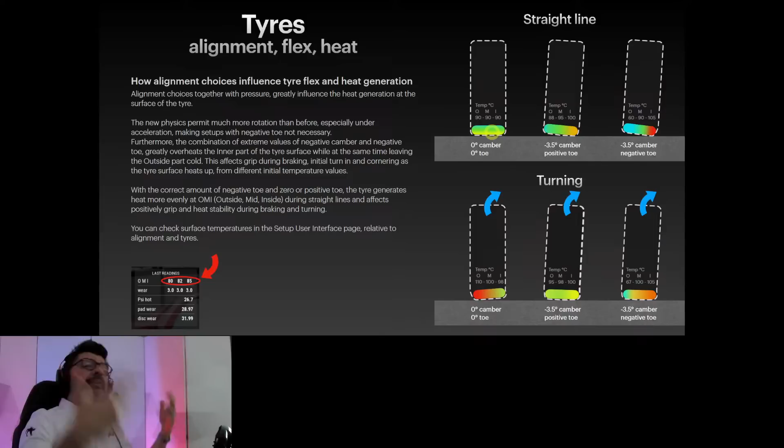Okay. So here's what's going on. When we're riding in a straight line, ideally with 0 camber and 0 toe, the heat generation is going to happen from the flex of the tire as it rotates under the weight of the car, the downforce, whatever. We're going straight, we have 0 camber, 0 toe, and the heat generation affects the whole footprint of the tire. So you're going to see, for example, something like 90, 90, and 90 degrees on the outside, mid and inside of the tire. All right.

Now, when we are adding negative camber to the tire, in a straight line, what is happening is that the inner side of the tire is touching the ground, while the outside of the tire is practically not touching the ground. Especially with radial tires, which have an extremely stiff footprint. They don't flex much in the footprint, so when you give them this kind of camber, only the inner part of the tire is going to touch the ground.

And so you're going to end up, again, this is just an example, with something like 100 degrees on the inside, 90 degrees at the mid, and 88 degrees at the outside, which is not touching, and it is cooled down by the air, and only by the air.

Yes, this document will be released with the update on Wednesday, free for all. You will have that as a mental note. You can read about it, take care about it, and take the best advantage from it as much as you want. Now, what happens when we do negative toe?

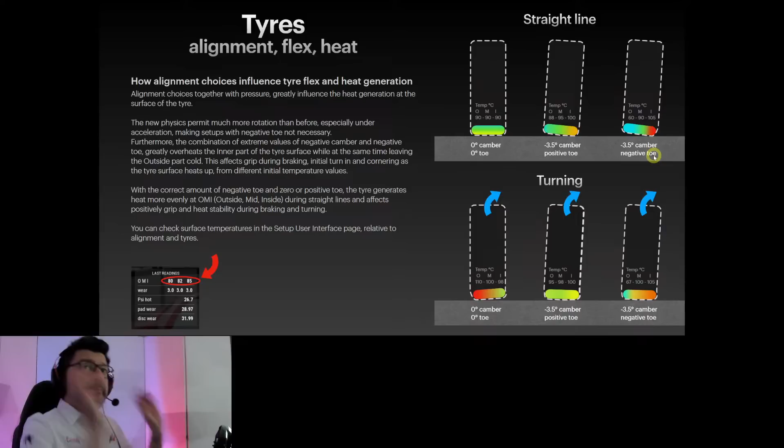Okay, so we get the negative camber and negative toe. All right. So when we do negative camber at the same degree and negative toe, the tire actually wants to rotate and go to the outside with negative toe. And that means that because it wants to rotate and go to the outside, it's going to flex the inner sidewall and touch even more and has extra friction on the inner side of the tire. So you're gonna get even more heat generation on the inner tire.

All right? That's going to mean that the mid of the tire is going to raise and have even less temperature, and the outside tire is going to raise up even more and have even less temperature. So the delta between the inner temperature and the outside temperature is going to be higher. Now, this again is an exaggerated situation, but it is to show you what is going to happen. Okay?

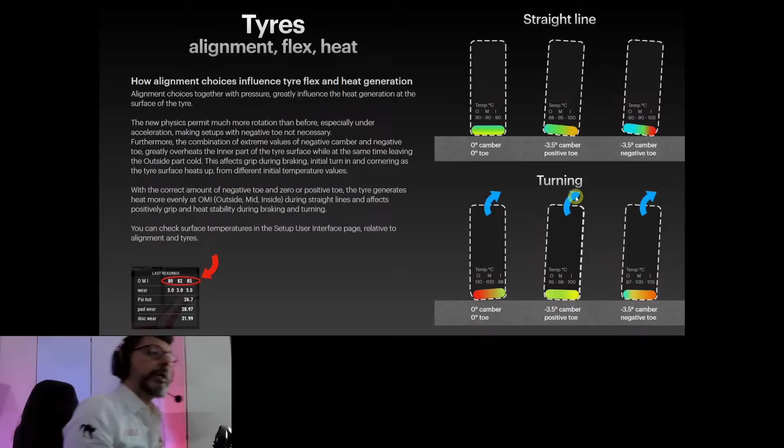Now, what is happening when you're going to turn? Well, if you don't have any camber, the tire obviously is going to flex and it's going to touch the ground. The footprint is going to be touching with the outside, so you're going to get a lot of heat on the outside. We've noticed that at Barcelona with very low camber and very low pressures. So flex of the tire, outside touching the ground and making all the grip, and the inside practically almost raising up and almost not touching and having much less grip. So this is not an ideal solution because you're going to have a lot of temperature at the outside and less temperature on the inside.

If you have a lot of negative camber and some positive toe, that will create the biggest footprint of the tire, and it will give you a good delta and graduality between the outside temperature, the mid temperature, and the inside temperature. It might not always be as ideal as this, because we saw before at Barcelona, for example, that the outside temperature was reaching anyway 105 degrees, okay?

But the more negative camber you have and some positive toe, the closer the difference between outside and inside is going to be, and that will help you, and it also means that you have a big footprint of the tire to the ground. All right? So it is an advantage. Again, the numbers will vary a lot depending on the track surface, the ambient temperature, how you are pushing the tires, the pressure you have, how long is the turn, and so on and so forth.

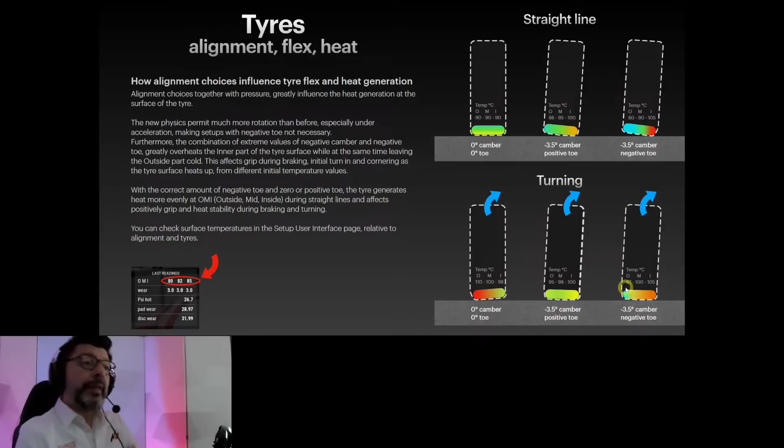If you're using negative camber and negative toe, the inside, already very heated up on the straight line, is going to still be heated, and the inside is going to raise and the outside will remain very cold at the initial part of the turning. That means that while you are going into the turn with negative toe now, you are going to get more instability because of that, and your grip is not going to be ideal, because you're going to have a big delta between inside and outside.

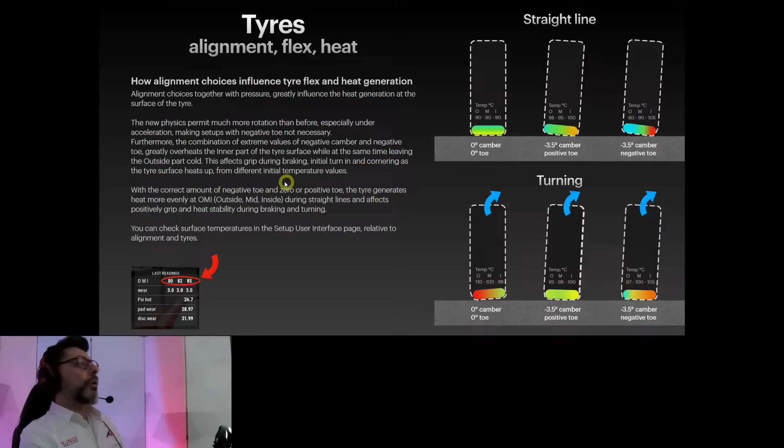Okay, and I would like to demonstrate that to you and show you also what difference it is. The difference is not amazing, it's not night and day, but there is a difference, and we will talk about also how this is going to affect your tires later in a longer stint. All right, so let's go in game again and see about that. So I would like to show you this at Monza in a hot stint, because it's going to be very easy to demonstrate. So let's go at Monza. Same car, same conditions. Okay.

Thank you for the follow, Kev. Consistency. Try to be fast, but don't push it too much over the limit.

All right, so we're going to go at the aggressive setup, and we're going to go full crazy negative toe and all the negative camber that we can get. All right? And let's see what is going to happen. So what we're going to do now is we're going from the hot stint, which is before the Parabolica. We're going to do the whole Parabolica, the whole start-finish straight line, and at the braking reference point, we're going to hit ESC and come back and see what happens, and take note of the inside, outside, and the mid temperature of the surface of the tires. All right? So let's have a look at that.

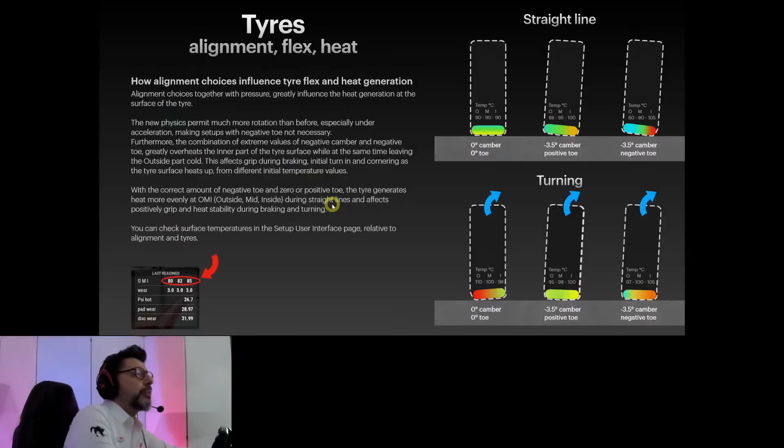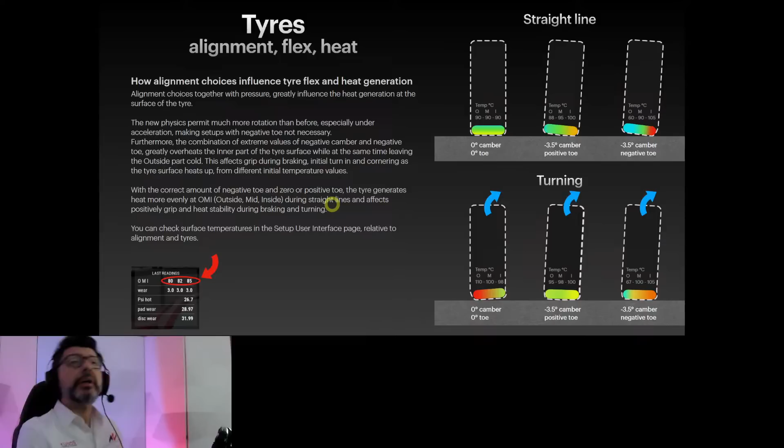Are the meta setups going to work? Sometimes yes, not always. What I'm expecting is that if you get this new version and instantly try a meta setup, you're going to get so much rotation that it's going to be, you know, not so good to drive. But most importantly, with our testing, and also the eSport drivers, the qualifiers for Monza, are testing the beta right now.

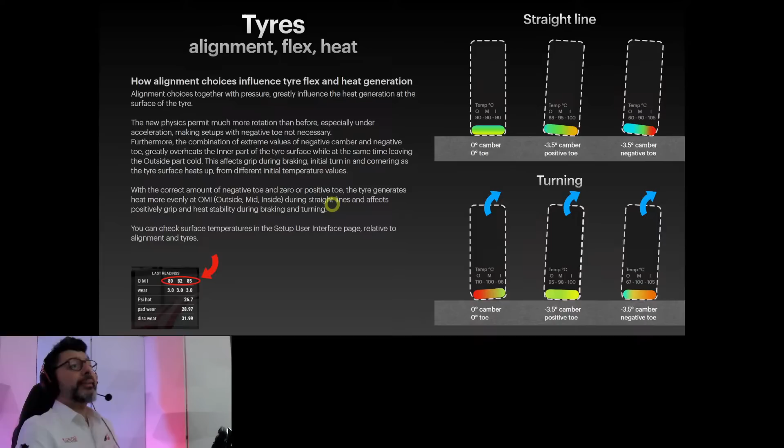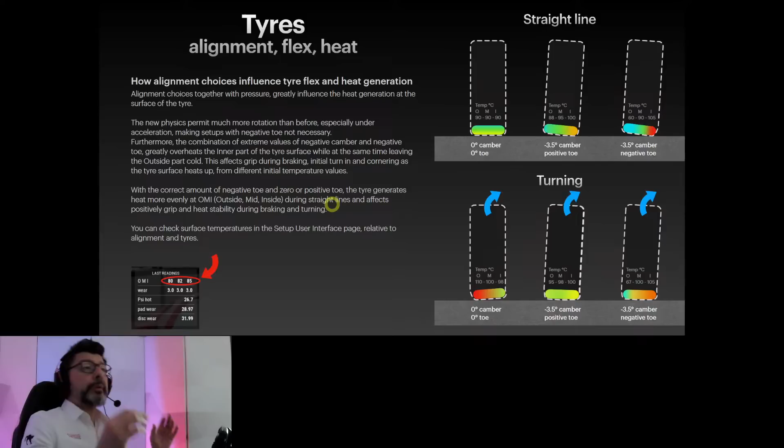And what we see is that it brings you to a dead end on the setup strategy, you don't know what to do, and the car doesn't really react that nicely. It pays much more, both in terms of handling, how you feel the car and how consistent you can be, and possibly even lap times, because we see that they can do the same or even better lap times if, instead of going full negative toe as usual, you keep a somewhat neutral toe around 0, a little bit positive maybe, and you play a little bit with the pressures and the camber, and you get all the rotation that you need and much better options to try out.

For example, if you go into the setup and you are in a situation like this, you have no other options. If a driver says, I need more rotation, what can I do? There's nothing you can do on version 1.8, right? That was the fact. Nowadays, if you do that, it's not like the car is going to be completely undrivable. But it doesn't feel correct, and the feedback we get from the fast drivers and our testers is, honestly, we don't like it. We would like something different.

But if you follow the logic in the document that we will be releasing and that you are looking at during this live stream, and you are in a situation like this, you get all the rotation that you need, and you also have a lot of options. So if you want a little bit more stability, go up with the camber, or leave the camber like this and go up a little more with the toe. That will give you more stability and a more even surface temperature, which is a big win. And with less camber you also get better braking distances.

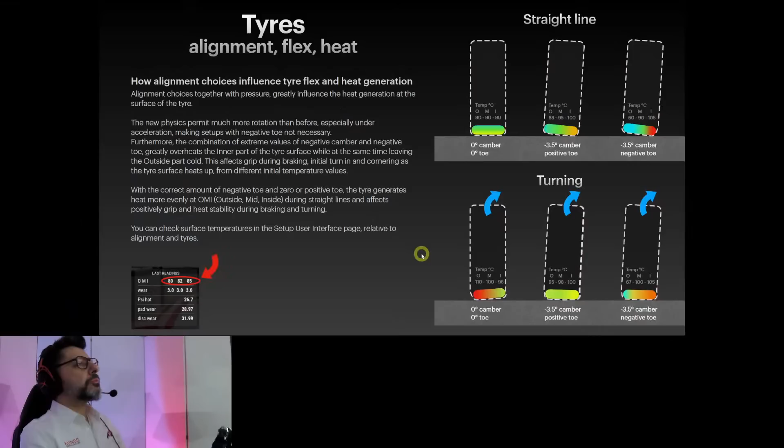So, what does all this bring us? Let's see also in the document how the extra flexibility gives you rotation. Okay. So, if we go here. Next page. So how you generate more rotation from more flex. Now, we were always trying to give Assetto Corsa Competizione extra front grip, lateral grip reaction.

Why is that? Because we were always having understeer issues in Assetto Corsa Competizione, and we were trying to find out what is going on with the front. Well, it turns out that we arrived at a level where we couldn't give any extra grip at the front. It wouldn't be realistic, and we're not here to do this kind of job. So it turns out that the problem was not actually at the front, but at the rear end.

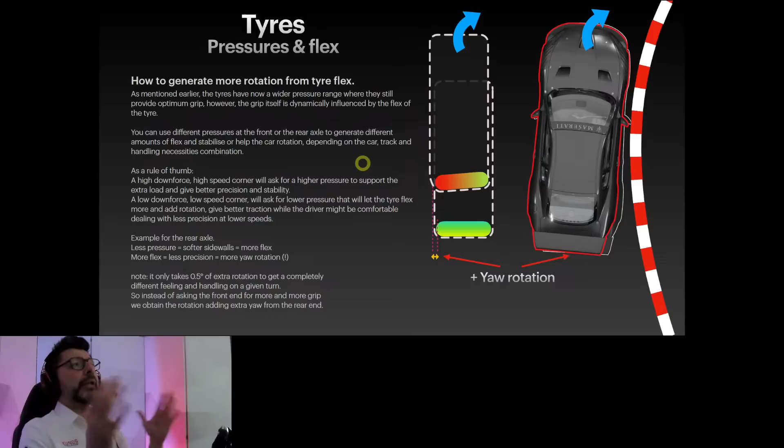The rear tires weren't generating enough slip angle, lateral slip, and they were not flexing enough when the car was turning at the edge of the lateral grip. So when you give less camber and less pressure to the tire, what you provoke is extra flex and extra slip angle. That means the tire moves with the whole body, because the body of the car is attached to the tire, obviously. It moves to the outside, so the rear end moves to the outside.

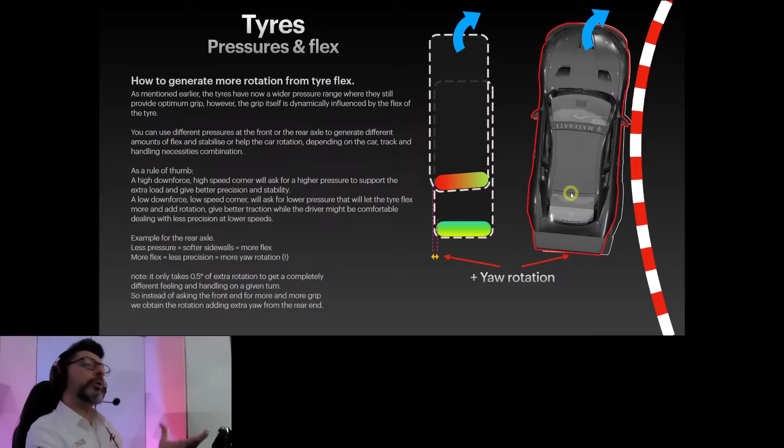It's just millimeters, just 0.5 degree extra of slip angle at the rear. It's a little bit exaggerated so that you can see the difference, but that degree extra is what provokes the car to gain more yaw rotation and to point the front end inside the turn, with the outside just slightly sliding around the whole turn.

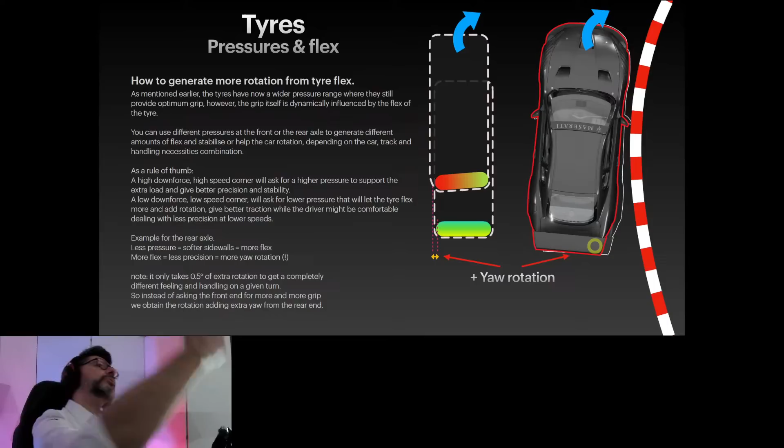Okay, so let me show you what I mean. Let's go back to Barcelona maybe and have a look at that. Oops. So what you're actually doing with different choices of camber and pressures at the rear or front tires is letting the car have more yaw rotation. Okay, let's go to Hungaroring. It's been a while. Yeah, you can see the old Porsche Barcelona, sure.

Alright mate, this session is about consistency. Try to be fast, but don't push it too much.

So, aggressive setup. Let's give it a little bit less camber at the rear, not much, 32. Let's lower the tires by 1 psi at the rear and at the front. Okay, and let's try it out. Low tire pressure, stay clear of the curbs.

You see at the acceleration how the car reacts and already wants to turn. Let's heat up the tires a little bit so that the pressures arrive at a good point around 26, 27. Look how much extra rotation we gain at the exit. I don't even have to turn my steering wheel much. I'm even too slow here. Rotation at the exit. And let's go. Look at that. Whoa, too much.

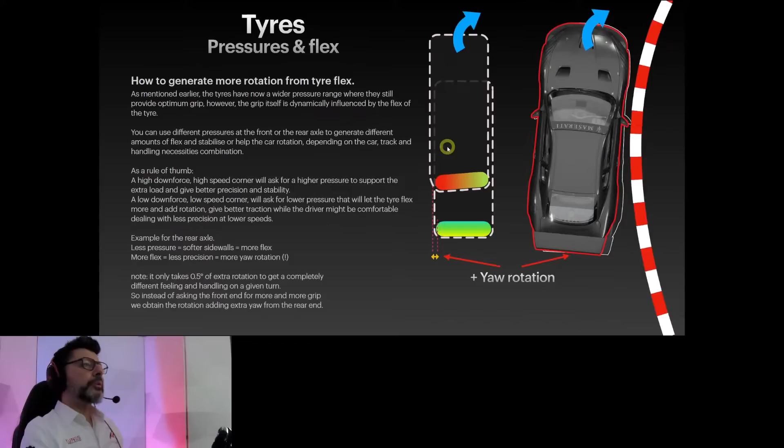Okay, so, conclusion of all this stuff. First of all, again, I remind you, this document is going to be released for you guys together with update 1.9. As usual, the update and all the updates on the BOP that we will talk about, and all the updates on the physics and everything, new liveries 2023 and so on, are going to be free as usual. And obviously the DLC is going to be paid content, but you can join servers as usual and see the other cars of the DLC even if you don't have it, and race together with your friends that might have got the DLC when you might have not. Typical Assetto Corsa Competizione stuff.

Right, so after all of that, what is going to happen with the so-called meta setups? All right? Sorry. So, meta setups. Are they going to work? Are you going to see them again? Are people going to appear in front of you as the new Jesus and tell you that this meta setup is still the fastest of them all? Yes, probably yes.

But, again, in my very humble opinion, the fact that it kind of works doesn't mean anymore that it is the only way, and most importantly the best way, both for the tires, for the longevity of the tires, and all that stuff. Okay, so it's gonna take time. It's gonna take a lot of discussions with myself and the aliens and the people that are creating setups and so on. We're already having those discussions.

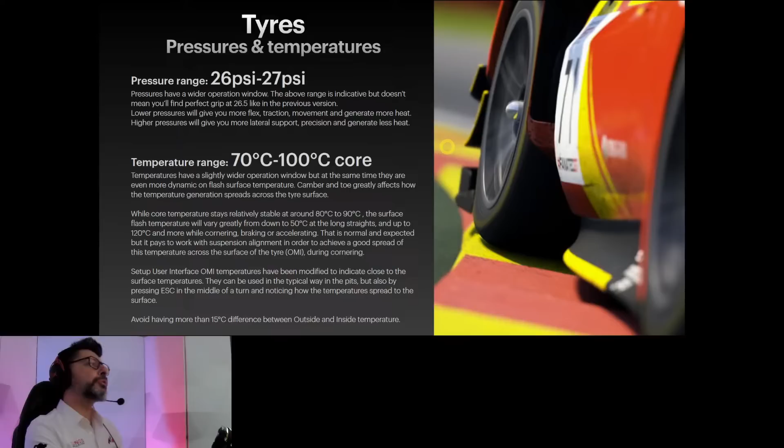Yeah, so let's do it. Okay. All right. So let's pick the old Porsche and see if it rotates. So old Porsche it is. Here it is. Yay, the old Porsche. And let's go to Hungaroring. We were at Hungaroring.

Right, this session is about consistency. Try to be fast. Aggressive setup. I haven't been driving the aggressive setup here for a long time, so I don't know what we're gonna find out. Let's see.